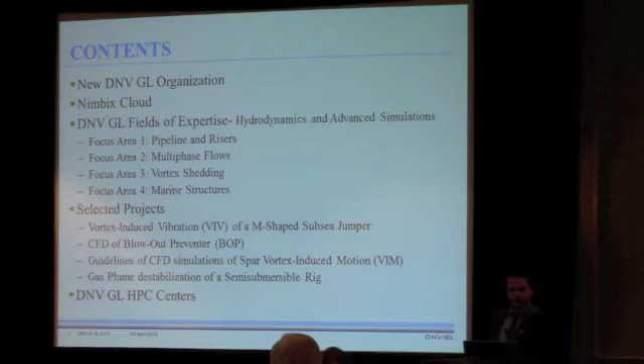This is our first time in the HPC user forum. I'll first talk about DNV GL as an organization, since probably most of you don't know or have little idea what we are doing. Then we'll move to the Nimbix cloud solution we've used for a couple of applications, and our CFD fields of expertise on pipelines and risers, multi-phase flow, vortex shedding, and marine structures. I'll talk in detail, then show some showcases through selected projects we've conducted.

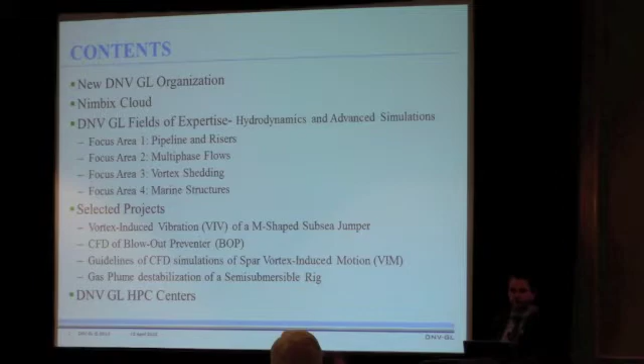Legacy DNV was headquartered in Oslo, Norway, and GL was headquartered in Hamburg, Germany. They merged in 2013, and also include companies like Kema in energy, Noble Denton in maritime, and Garrad Hassan for renewables and energy. Now the company is called DNV GL. DNV GL is an independent organization, so we are basically a third party for verification. We do qualify technology.

We operate in different units: maritime, ship hydrodynamics, stability, and transportation; oil and gas, from the bottom of the sea floor to the topside of the structure; energy and renewables, like wind turbines and wind farms; and business assurance. DNV also has software, used for maritime and oil and gas business, based on potential theory rather than computational fluid dynamics. DNV is a unique organization that invests 5% of its revenue into research and development each year.

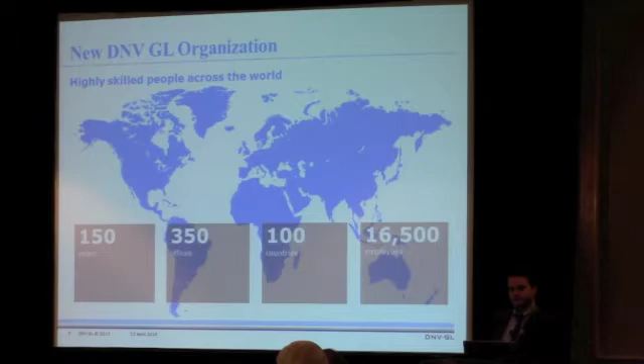DNV GL has been around for 150 years in the certification business. We have 350 offices around the globe, and after the merger with GL, DNV GL now has around 16,500 people.

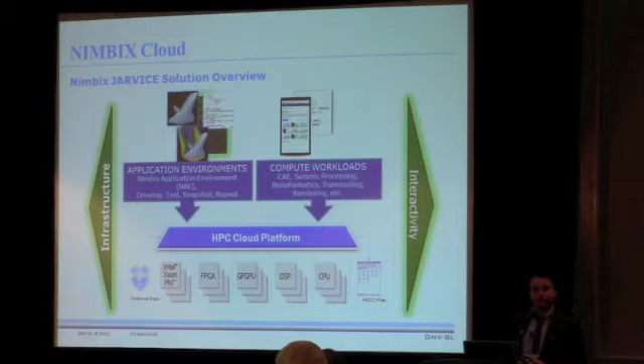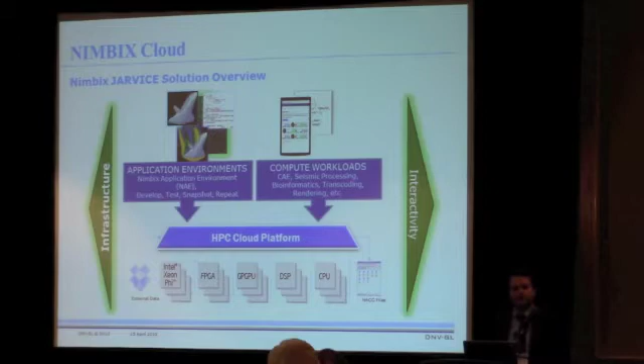Let me briefly talk about Nimbix Cloud. We had to run CFD studies, and for big scale studies, at the time we didn't have the computation power. Although we had the software, we didn't have the hardware. So we chose to use Nimbix Cloud because it was easier for us. They have a cloud operating system called JARVICE, where you can run your jobs in batch mode or interactively. It's a software as a service company for end users, with point and click applications.

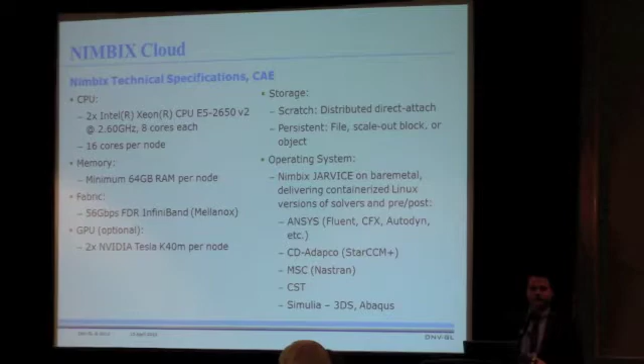Nimbix currently has 1,200 cores, 16 cores per node, and each node has 64 GB of RAM. Through the Nimbix JARVICE program, we can run CFD software like ANSYS Fluent, CFX, and Star-CCM, as well as Nastran and Abaqus for FEA and ANSYS Mechanical for FEA. These are important because in the subsea environment, when looking at the behavior of structures, there's vibration, so you have to couple CFD and FEA through fluid structure interaction.

Our first focus area is pipelines and risers. Risers are basically pipelines that take the oil from the sea floor and carry it to the top surface of the floating platform.

There is a growing desire to install subsea equipment at deeper depths with looser support, which accounts for temperature effect changes and well growth. With longer and deeper seas, now talking about 10,000 feet of sea depth, the riser length is increasing and becomes very susceptible to vibration due to ocean currents and the motion of the topside platform. Vibration is very important because it may induce fatigue, which may ultimately cause collapse of the structure.

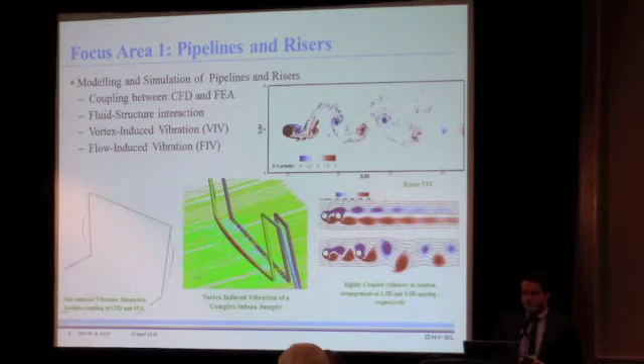So you can see here on the top right side, this is an example of vortex-induced vibration. This is a free vibration, basically the cylinder is moving in free motion, and the CFD solver and the equation of motion, which is a structure solver, are coupled in two-way.

Vortex-induced vibration occurs when the vortex shedding that sheds around the structure has a certain frequency. When this frequency of the vortex shedding equals the natural frequency of the structure, the structure starts moving, basically vibrating. This is very important because this cyclic vibration may cause fatigue to the structure.

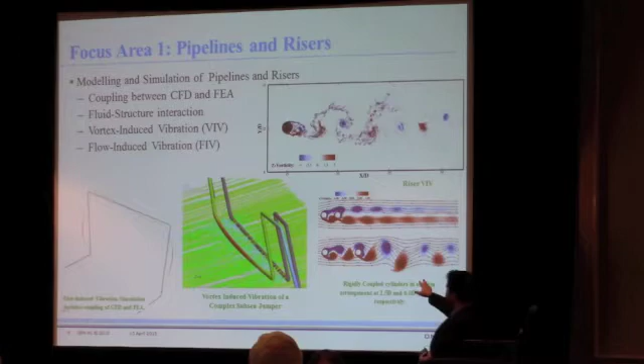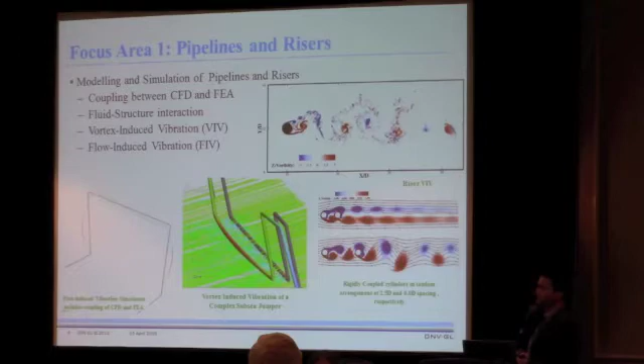This is based on basic external flow, and you can think about cylinders in tandem - those can also vibrate. But you also have flow inside the pipe, the oil or the hydrocarbons. So when there's a slug flow coming into the jumpers, subsea jumpers, the structure can also vibrate. Those vibrations are coupled using CFD and FEA solvers together.

Multiphase flow includes multi-component flows, basically - you can have gas liquid, external flow and internal flow. If you look at system flow assurance, you're trying to investigate the integrity of your pipeline because you don't want to stop production. When the oil hydrocarbon gets into the pipe, other problems occur, for example erosion or corrosion. You are able to model those problems, assess the forces, and mitigate the problems using CFD by introducing better designs.

On the right top, you can see a gas plume study that we have conducted. The objective of this study was to assess how a gas plume formed after a gas leakage from a pipeline under the seabed can affect the stability of the structure.

On the bottom left, you see again gas leakage from a high pressure pipeline to the ambient atmosphere.

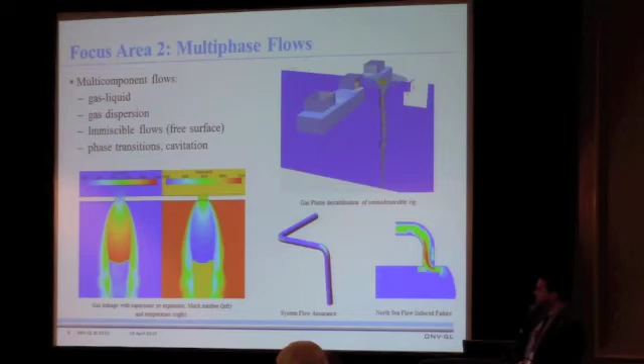Vortex shedding is our core business, and where our strength is, basically. Accurate predictions of structural integrity require accurate predictions of the loads on the structure. It is highly skilled work, requiring highly skilled hydrodynamics professionals, and DNV is a very advanced developer and user of all types of software for predicting vortex shedding.

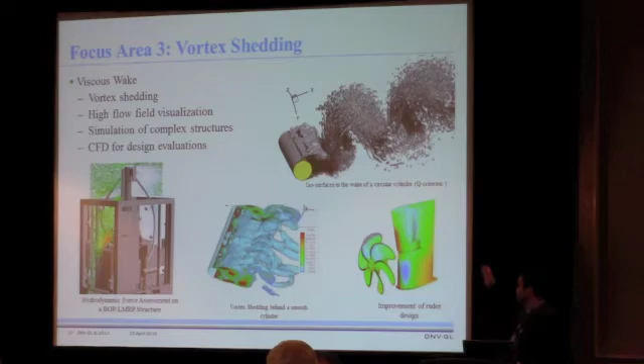Vortex shedding may happen on a simple structure like a cylinder, but it is pretty much highly complicated to investigate because of the turbulence and turbulent boundary layers at different speeds of the current.

If you look at a complicated structure like a blowout preventer, assessing the hydrodynamics of this structure is also important, because this blowout preventer sits on the wellhead and you don't want a well blowout. There's a huge structure sitting on the wellhead, and you have to calculate or assess in the design the added mass forces or hydrodynamic forces acting on the structure.

You can do design improvements using CFD. So you can see a picture of rudder design with different geometries, with different flow conditions. You can basically propose different designs of structures.

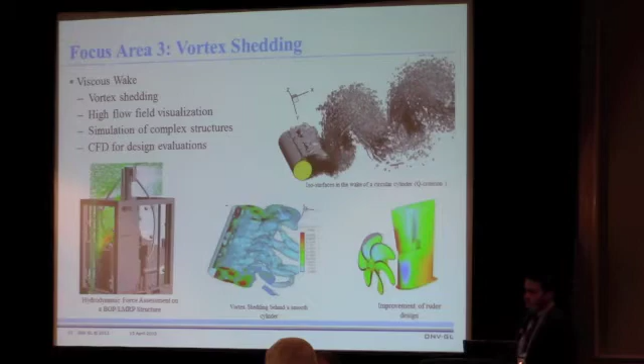One of the other focus areas is marine structures. You can see a simulation on the bottom right of a semi-submersible sitting on the seabed. This is basically susceptible to nonlinear waves.

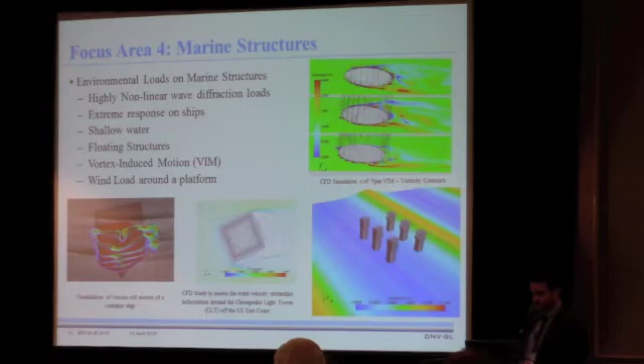So DNV GL has conducted a preliminary study for vortex-induced vibration of an M-shaped subsea jumper. We have conducted this study because our client ExxonMobil approached us for this challenging problem.

Basically, they have run an experiment case. Let me just write this. So these subsea jumpers are connected to the Christmas trees or subsea blowout preventers.

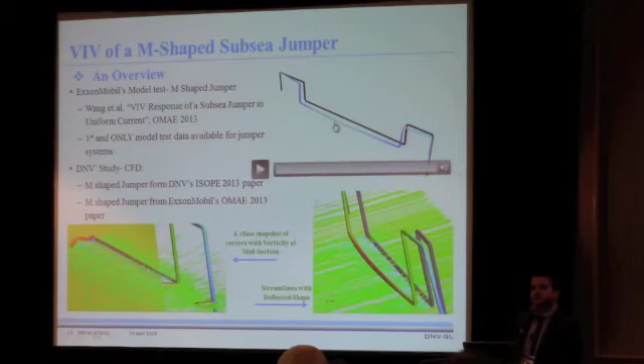So ExxonMobil has run a tow test for VIV response of this subsea jumper under uniform current, and they have experienced vibration. This was the first, and so far only, first-of-a-kind model test on the jumpers.

What we have done is an initial study to validate the experiment work with CFD. We used software called Star CCM, coupled with Abaqus FEA solver, to estimate the vibration amplitude. So this was an initial study.

This is an undeformed geometry of the jumper, and this is the deformed state with the stress magnitudes on the jumper shown in the figure, when the current is hitting the jumper.

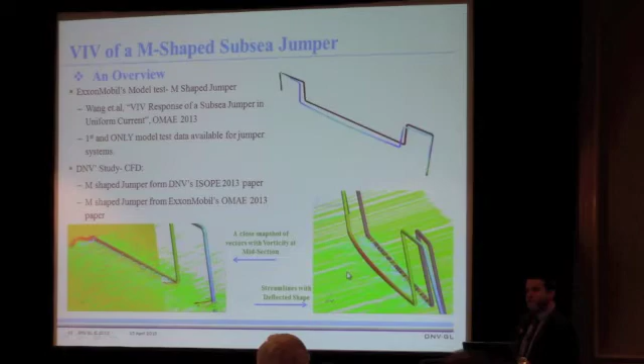Another study, this time on a blowout preventer. A blowout preventer is a piece of safety equipment used to circulate kicks and control the pressure of the well. A kick is a phenomenon due to pressure difference when a high pressure formation is reached, generating an unfavorable pressure gradient that causes an influx of fluid. So the blowout preventer, as the name implies, sits there to prevent these kicks and prevent a blowout.

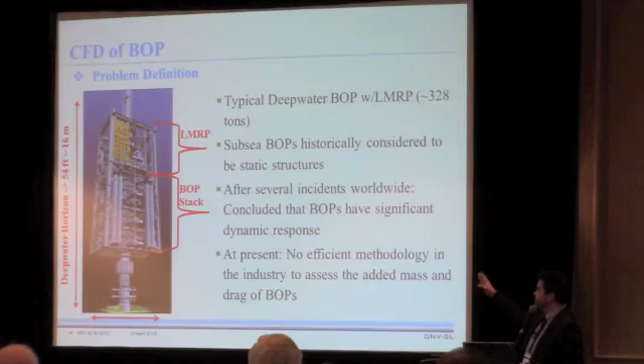A typical blowout preventer, if you consider the Deepwater Horizon accident after BP's investigation, was about 16 meters tall, or 54 feet, so a four-story-high blowout preventer. Those structures are around 300 tons, sitting on the wellhead.

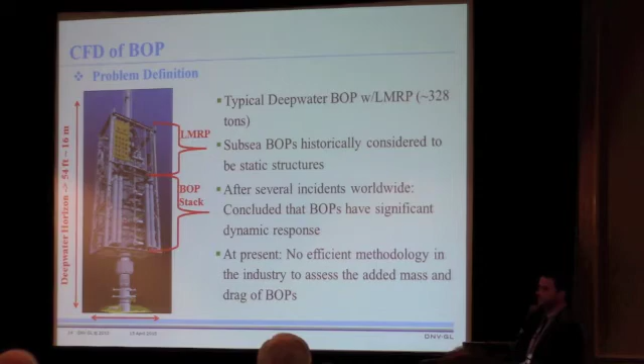We found that BOPs have significant dynamic response. Those investigations were done after these accidents, and at that moment, there was no efficient methodology to assess the forces on these blowout preventers.

One way to assess is to run a CFD analysis, but post-processing is also important, because the net force acting on the structure is a combination of added mass, which is the inertial component of the force, and drag force, which is basically the viscous forces acting on the structure.

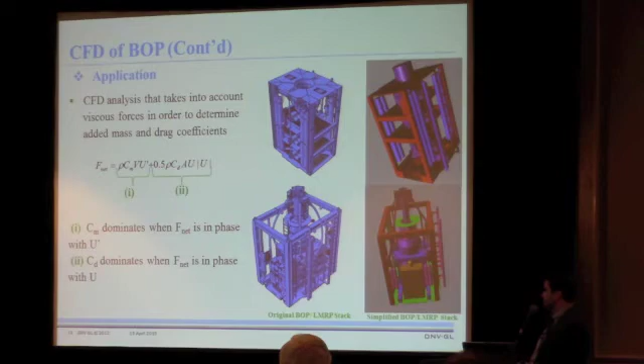This last part talked about the geometry preparation. Once we have a watertight geometry, you need to put it into the CFD solver. You're still in the pre-processing stage, but now you mesh it.

Initially we had done 12 million cells for the domain, that's all the fluid around the structure, but now we've extended it to 70 million cells.

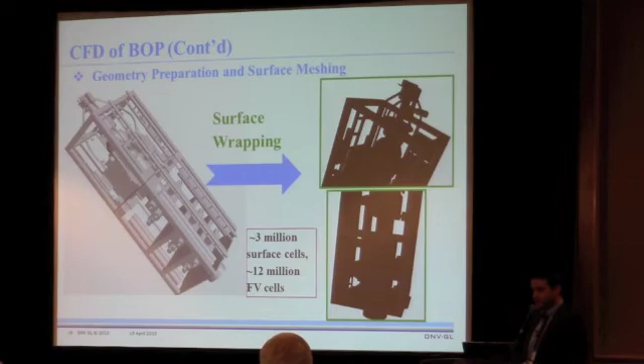Then we started exploring how to run this, because at that time we didn't have the hardware or CPUs for it, so we approached Nimbix and used their cloud solution. We used up to 1,000 cores, and for a steady case it takes around 3 hours, but for an unsteady, moving structure deformation case, it took a couple of days.

So post-processing involves some flow visualization. This is a complex structure, but the flow around it is also complex, depending on the current acting on the structure, so you have a highly turbulent flow. The flow is also interacting with the structure, so the vortex caused from one part of the structure is basically merging with another vortex structure from another part of the domain.